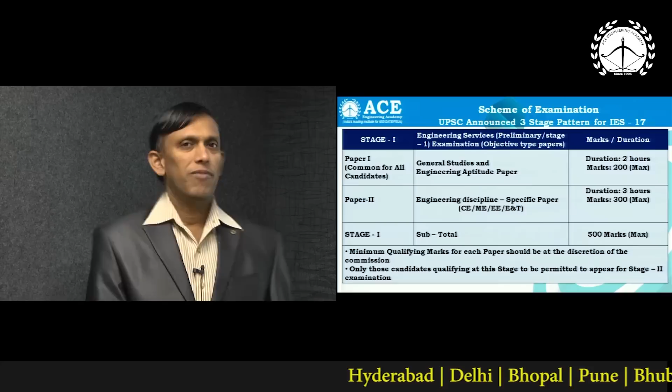I welcome you to the awareness session on IES for the revised scheme announced recently by UPSC for 2017. You know, the pattern has changed.

So it has a three-stage or three-tier system. The stage 1 is preliminary. This preliminary exam, stage 1, is likely to be conducted in the month of February 2017. So this preliminary part, stage 1, will have two papers.

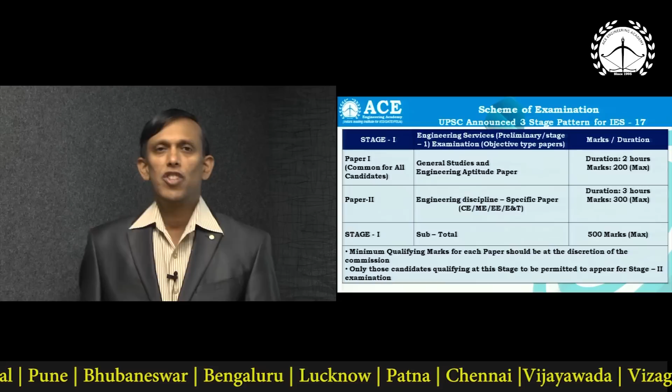Paper 1 is common for all branches - civil, mechanical, electrical and electronics and communication. It is general studies and engineering aptitude. This particular paper has 2 hours duration and 200 marks, a very deciding one.

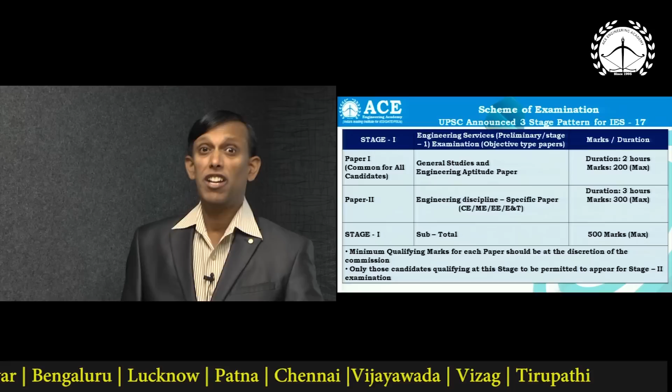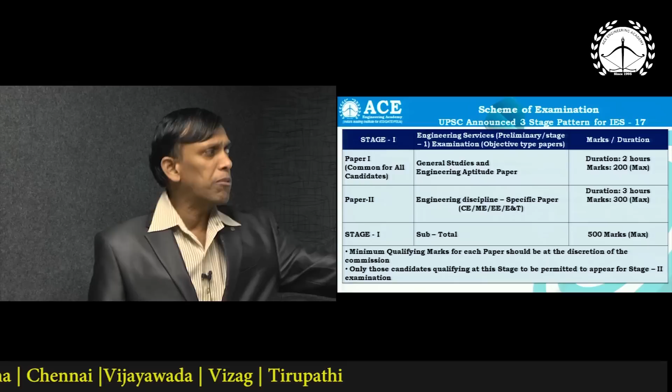The second paper is engineering discipline. For you, it is civil engineering, the entire syllabus of civil engineering. Again, it is of 3 hours duration and 300 marks. So the subtotal of stage 1 is now 500 marks.

So if you clear this stage 1 with the maximum possible score, then only you can enter stage 2. UPSC may decide the number of candidates to be selected for mains in the ratio of 1:10 or 1:12, or at their discretion. Now let us see stage 2.

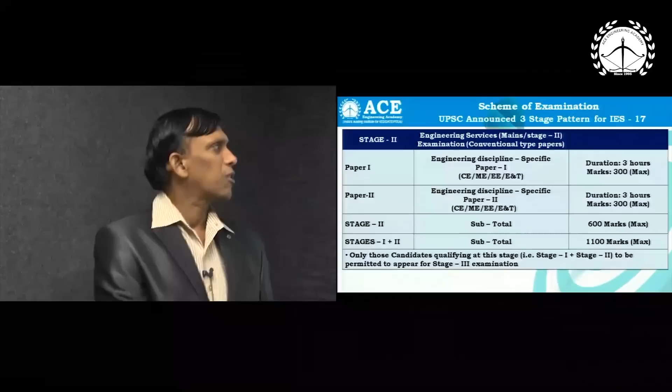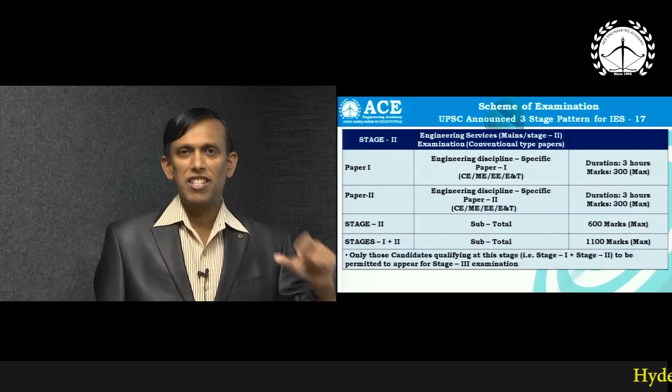So stage 2 is with respect to engineering. We are civil engineers, so there are 2 papers. The entire civil engineering syllabus, which is in prelim, is now divided into 2 papers. Paper 1 is 3 hours duration, 300 marks. Paper 2 is 3 hours duration and 300 marks. So the subtotal for stage 2 is 600 marks.

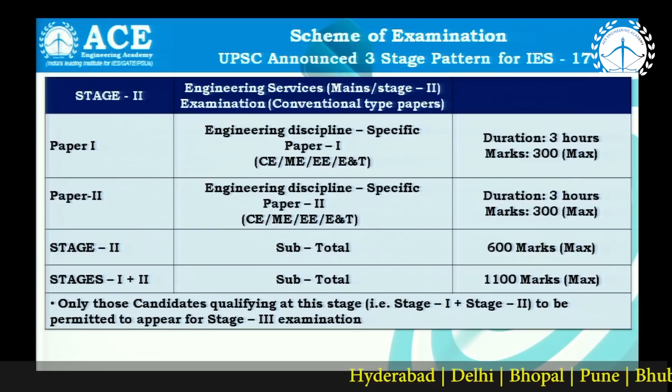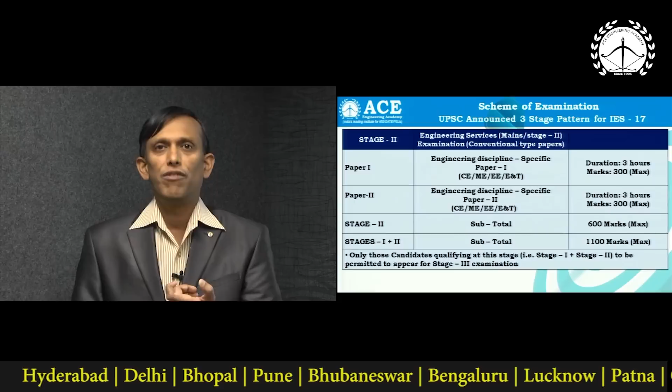Now, as you know, the final written marks - not only of stage 2, even stage 1 also - will be included. So the total of stage 1 and stage 2 will be 1100 marks. Now based on your combined score of stage 1 and stage 2, students will be called for the final stage, that is personal interview, generally in the ratio of 1:2.

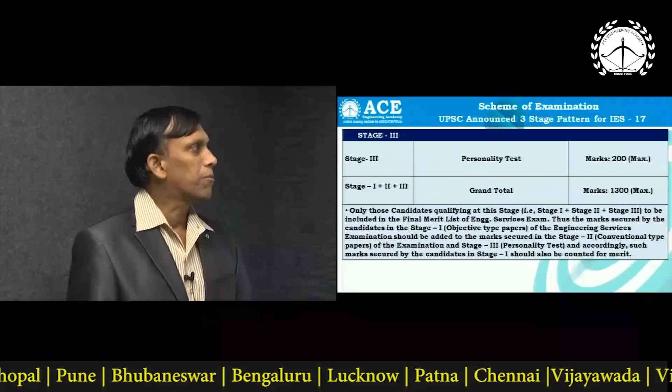So for stage 3, the personality test, as usual, maximum marks are 200. Now the total of stage 1, stage 2 and stage 3 is 1300 marks. Of these 1300 marks, whoever scores the highest, they will be the rankers or they will get the jobs.

Now let us see what is the importance of stage 1. It is almost, I can say, a new syllabus. Compared to the previous syllabus, I say that minimum 80% is new change.

As you know, general English is almost kept aside, maybe for the benefit of rural area students, or since engineering education is in English medium, it might have been kept aside. The traditional general studies subjects like history, geography, polity, biological sciences, etc. are also a little bit kept aside.

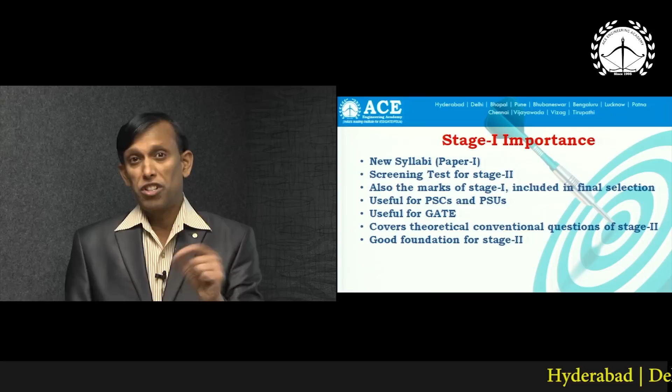So anyway, nothing to worry. As I said, this is not only a screening test for stage 2, but the marks of stage 1 will be included in the final selection. So it is not only screening, but also it is going to be a deciding factor for your final selection.

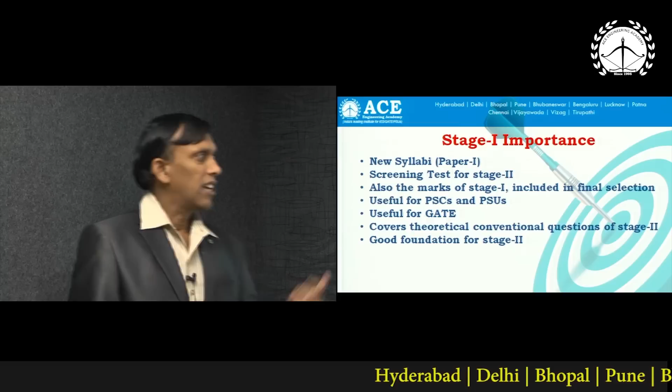So it is also useful for public service commissions and PSUs. I am watching the syllabus of various state service commissions in India for the last few years. The syllabus of various state service commissions and generation corporations has changed a lot. Now the new syllabus of particularly civil engineering is almost matching with the syllabus of various state service commissions.

So if you prepare for stage 1 of civil engineering seriously, sincerely, not only can you crack IES prelims, but also the State Service Commission Group 1 positions. Yes, not only State Service Commissions, it is also useful for PSUs, public sector undertakings.

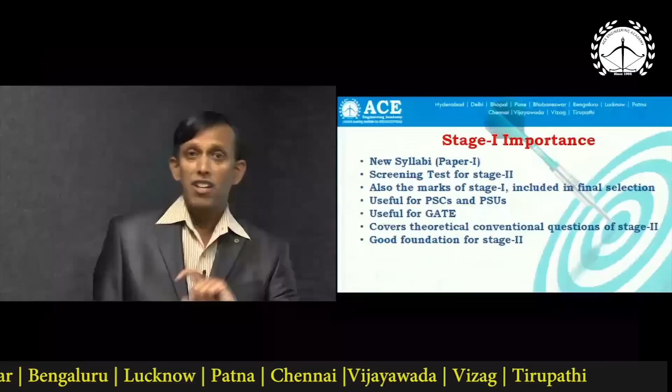In the stage 1 engineering aptitude section, certain topics like basic engineering, basic project management, and environmental issues are included. There are certain public sector undertakings conducting their own exams like SAIL, CSIR, etc. In all these company papers, which are available on websites, basic engineering questions are appearing. So if you prepare seriously for this stage 1 or prelims of IES, you can easily crack some of the public sector undertakings' exams. So be focused on the prelims.

It is also useful for GATE. The stage 1 is basically objective. Engineering services objective questions will be mostly analytical, theoretical, conceptual. There will be some numerical questions also, but much use of calculator is not required. In the GATE exam, however, there will be main focus on numerical questions.

So what shall we do? Along with the stage 1 preparation for engineering services, solve a little bit of numerical questions too, which may take 2-3 minutes each. With this type of preparation, IES prelims will be useful even to crack the GATE exam, which is not only for higher education in premier institutes like IITs and NITs, but also to secure jobs in various Maharatna and Navaratna companies.

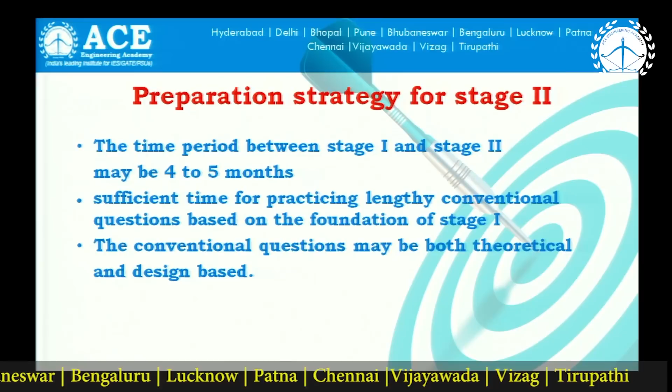Coming to stage 2: from my experience guiding civil services students, there is a minimum time span of 4 to 5 months between prelims and mains, because of so many operations involved in between. I expect UPSC will definitely give a span of 4 to 5 months for engineering services also. Is this sufficient? Perfectly sufficient, extremely more time I'd say.

So with these 4 to 5 months, what do you have to do? See, the foundation is already over. You have studied the theoretical part thoroughly. You don't compromise on anything as far as the theoretical part is concerned in stage 1. You have built up a very solid foundation. So with that foundation, preparation for stage 2 is a cakewalk, dead easy.

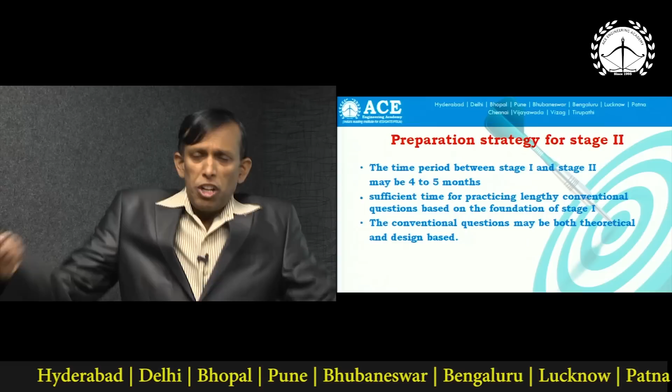It is solving nothing but lengthy conventional questions. According to my expectations, these mains questions may be, to some extent, in the pattern of civil services, with theoretical questions, conventional derivations, and also questions related to design aspects of civil engineering. It may be RCC design, steel design, or design combining structural analysis with RCC—a continuous beam given, and you have to design an RCC beam. Long ago when we used to write the IES exam, lengthy questions mixing two different subjects used to be there, so I am expecting that type of intermixing again.

The conventional question, as I said, may cover both theoretical and design aspects. So my dear student children, be focused. If you are a fresher, be strategic and have the right plan. With the right plan, there is no doubt you can clear prelims. It's not only a question of clearing, but you should secure at least 400 marks out of 500 in the prelim exam.

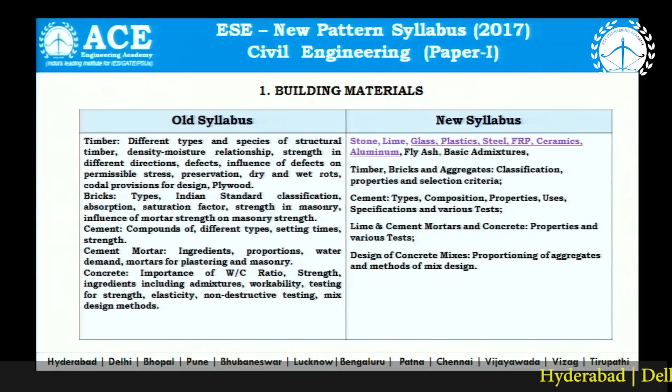As usual, there are 6 parts. The first part is building materials. Most of the building materials are as it is kept in the new syllabus, but a lot of new things are added, lot of conventional things are added. The new thing is the advanced thing, FRP, fiber reinforced plastics.

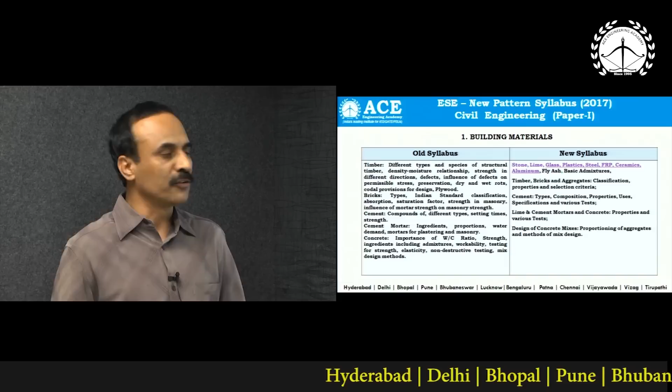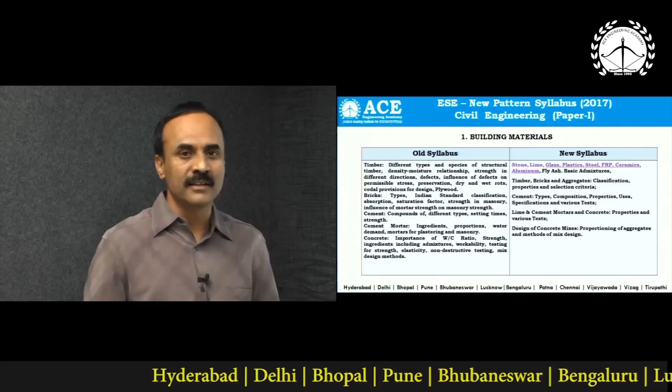All others are the conventional old methodologies. They have given emphasis to introduce all the sorts of building materials into the new syllabus. A little burden to the preparation, but however, theoretical aspects with a little conceptual and specificational memorization, one can become powerful in this area.

Points to remember: stones added, lime added, glass, plastics. Nowadays plastics are playing very important role. Along with plastics, FRP, fiber reinforced plastics, added.

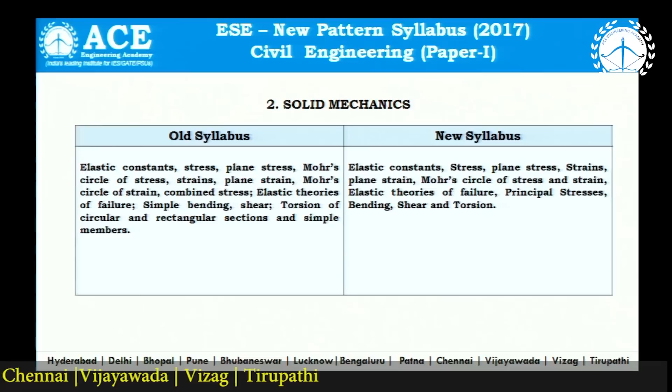Coming to the second subject, solid mechanics, old and new as it is. The new seems to be slightly concised, but actually speaking, most of the things are in short mentioned. It is nothing but a bit elaborated compared to the old. Old is to the point, now it is a bit elaborated. Points to remember: no changes broadly.

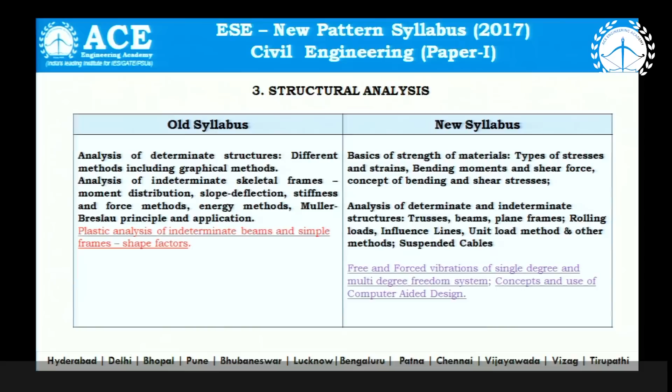Coming to the third part, structural analysis. In the old syllabus, plastic analysis and shape factors were there, but in the new syllabus they are not mentioned. But however, without this topic, structural design by limit state is not possible. So it is nothing but hidden.

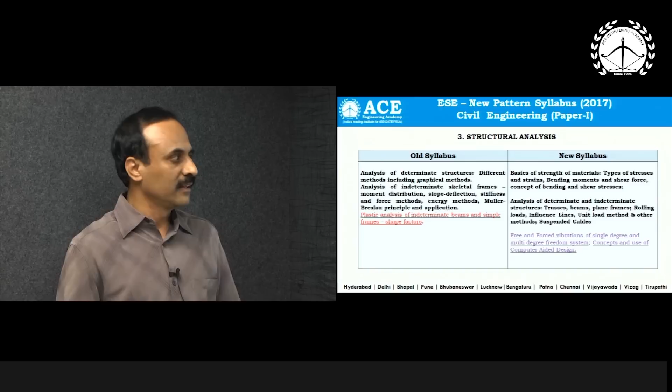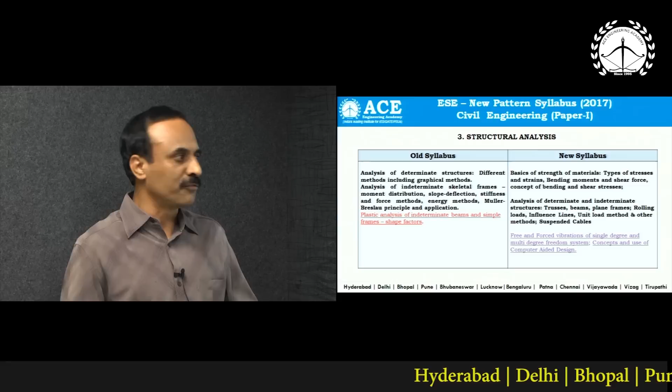And in the new syllabus, almost structural dynamics is added, free and forced vibrations are also added, with multi-degree freedom also mentioned. So it is a bit elaborated as far as the structural dynamics aspect of the syllabus is concerned.

Computer aided design concepts are added. It gives a sort of fundamental concepts behind the computer aided design. Things like finite element analysis, matrix approaches, and other relevant matrix correlations will be added into the syllabus.

Points to remember: plastic design hidden and structural dynamics added.

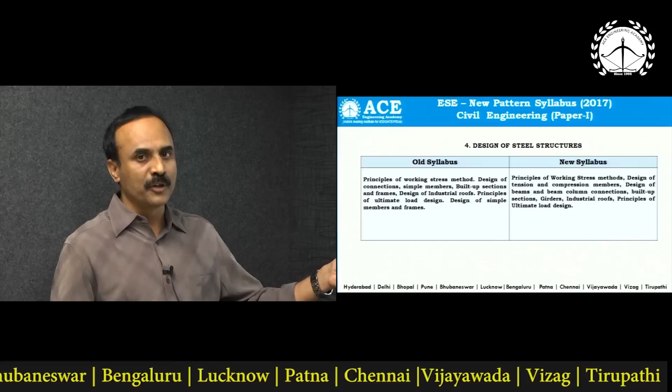Coming to the fourth, design of steel structures as it is, no changes at all. And in the design of steel structures, we require the plastic analysis, shape factors, all the other things. Points to remember: almost no changes.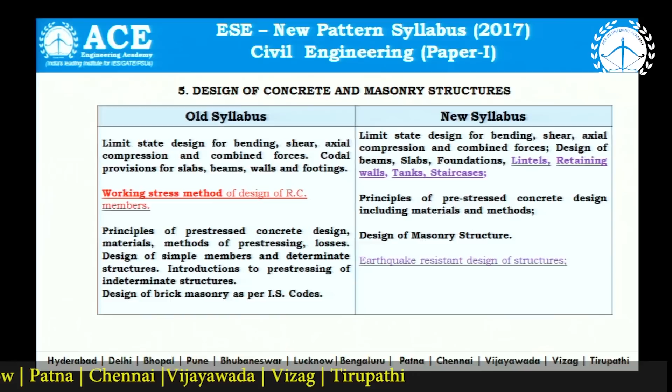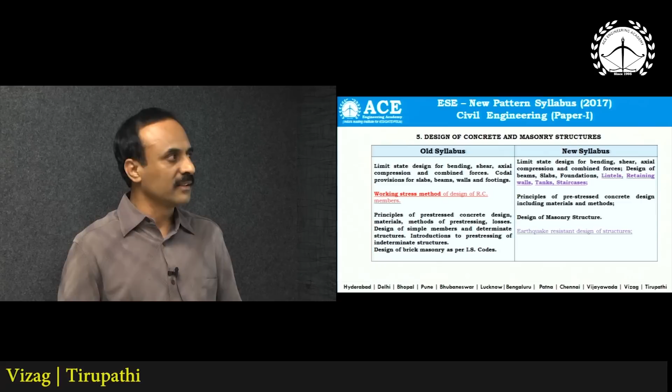Coming to the design of concrete and masonry structures, working stress method concepts are hidden in the old syllabus. Without working stress concepts, the newly added water tanks are not possible to design. But however, in the new syllabus, lot of things introduced: lintels, retaining walls, water tanks, staircases.

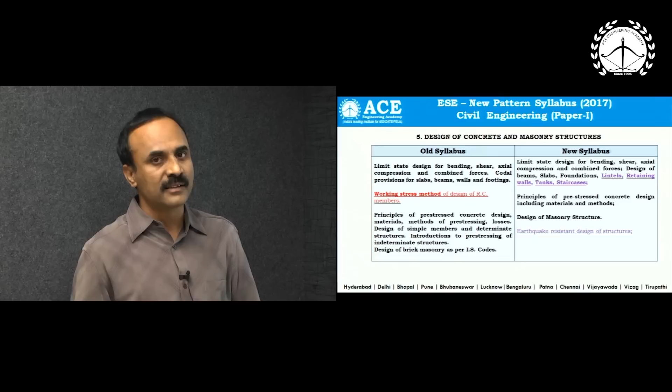This is extra burden to the people who are preparing. Actually speaking, all these fundamental things require lot of attention, lot of codal specifications, and lot of emphasis on the use of codes, especially water tanks, staircases.

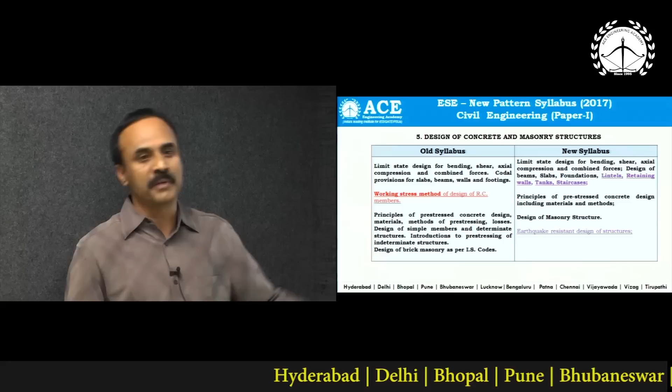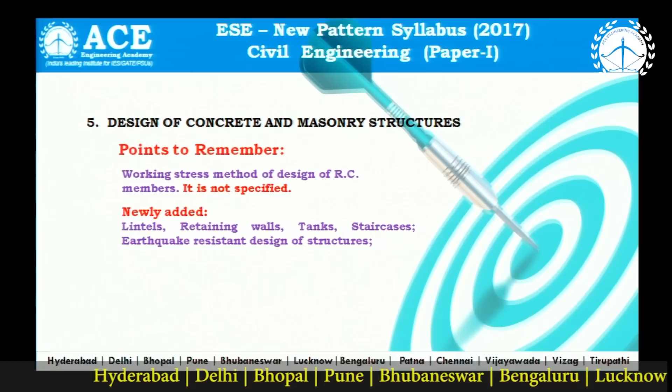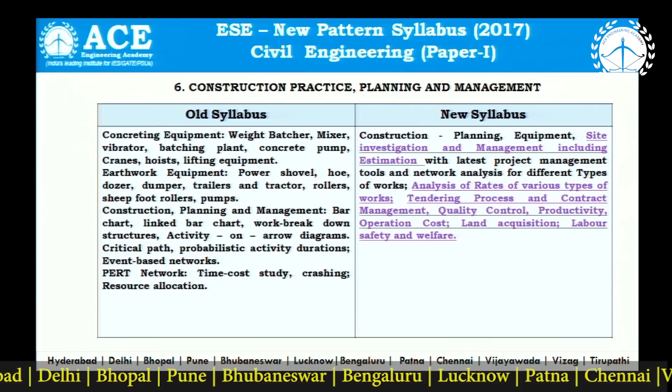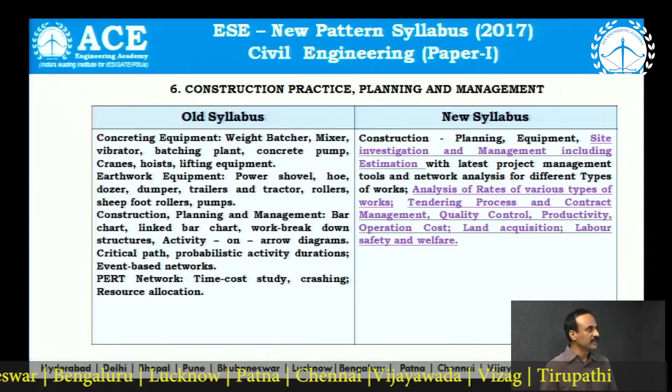Coming to construction practices, planning and management: old syllabus was lengthy, but each and every small topic was explained there. In the new syllabus, most of the practical relevant things are added, especially starting from the land acquisition to labor safety, welfare, rate analysis, tendering, contracts. Most of the practical relevant things are added.

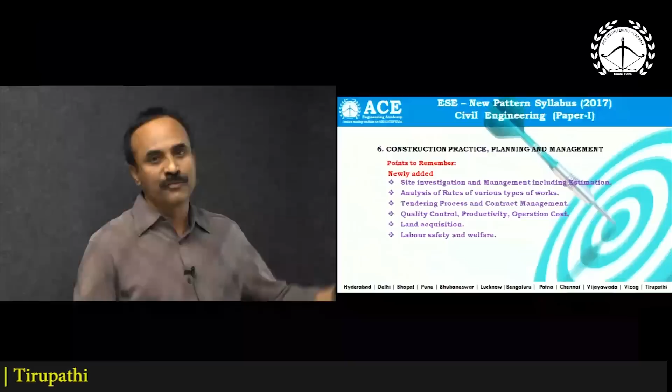It seems they are expecting people with practical knowledge to come into the services. And the points to remember: these are the things added. Management is also included. For a good UPSC engineer, management and all other practical relevancy is required apart from safety and welfare. These things are also added.

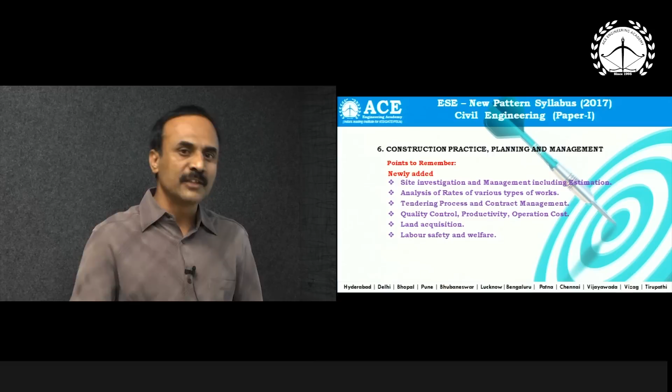Mostly these things are theoretical concepts, but however, there may be a chance of theoretical convention in this area. People with good explaining capacities and IQ levels can do well in this area. So overall, there is around 10 to 15% of extra syllabus in paper 1, and most of the things are theoretical except in RCC, structural dynamics, and all. Except that, most of the things are not requiring that much preparation, but however, people with keen interest, keen aspiration can definitely prosper well in this area.

It is better for the people who are going to join engineering services with upgraded knowledge. Definitely, this added syllabus will contribute to the growth of the nation, directly or indirectly. Thank you very much, I wish you all the best.

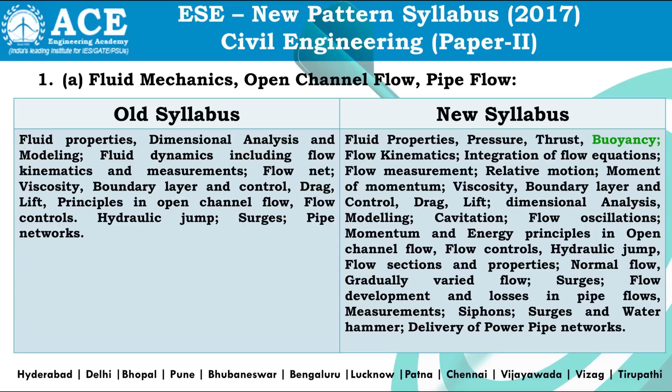Hi, this is Ayub Khan. I will talk about paper 2 of the technical subjects of Engineering Services Examination 2017, new pattern. As you all know, this paper 2 has totally 6 subjects. In the new pattern of the syllabus, all the 6 subjects have been retained.

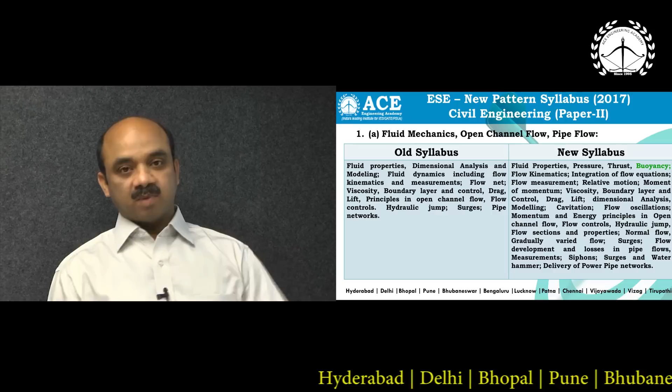In addition, a few topics were added in a couple of subjects. Now I would like to discuss this in detail, subject wise. To begin with, let us take up the fluid mechanics subject. As you all know, in paper 2, this particular subject carries a lion's share of the weightage.

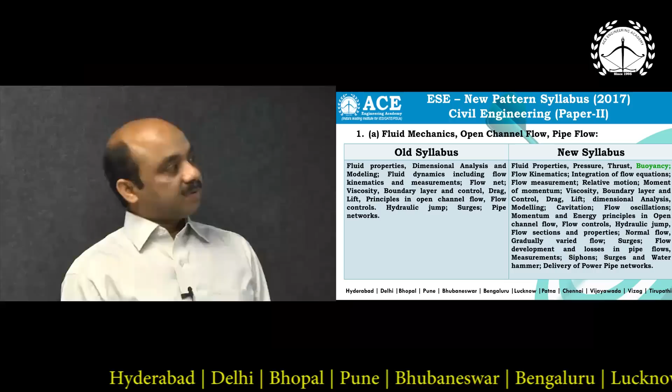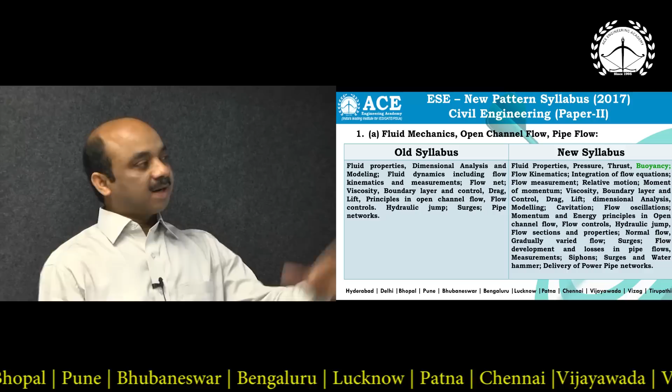Here if you see the old syllabus and new syllabus, don't bother to read the entire details here, not necessary. I will give another slide with a summary of this entire subject and what has changed. The old syllabus looks very brief, the new syllabus looks elaborate, but the content is the same for fluid mechanics, open channel flow, and pipe flow. Similarly for hydraulic machines and hydropower, the old syllabus looks brief and the new looks elaborate, but finally the content is the same.

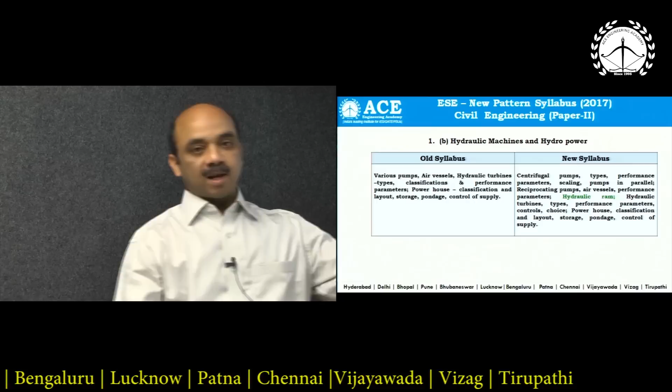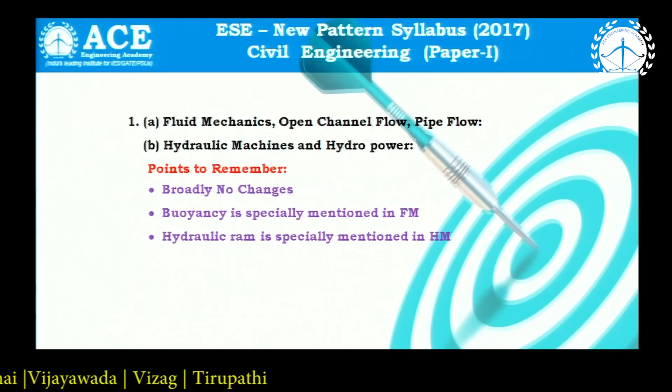Now I would like to make a summary of this entire subject with the next slide. So upon comparison of the old and new syllabus, finally what you can conclude is there are no changes at all. But the topic buoyancy is specifically mentioned in the fluid mechanics area, as well as the hydraulic ram topic specifically mentioned in hydraulic machines. Except for that, there are no changes at all.

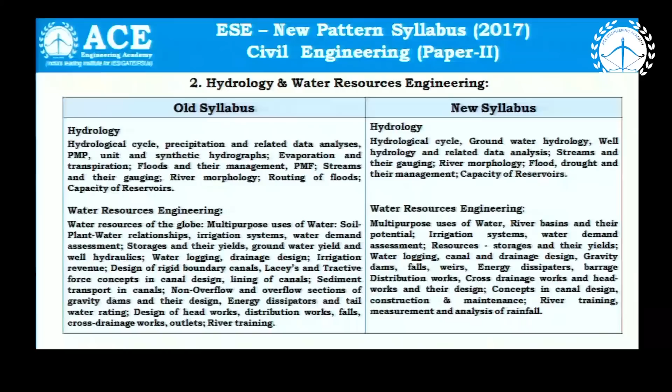Now we will move to the next subject, that is hydrology and water resource engineering. You can see this hydrology as well as water resources syllabus, old as well as new. Absolutely both topics are the same. But however, you can notice one thing.

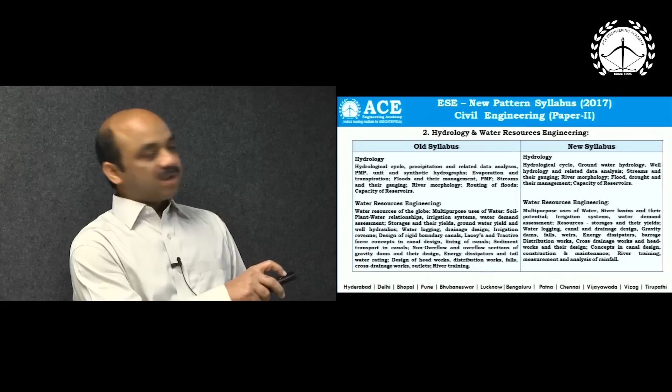In the case of the old syllabus, the unit hydrograph and synthetic unit hydrograph topics were specifically mentioned. In the new syllabus it is not explicitly mentioned, but it is implicitly understood, because the hydrological cycle is inclusive of hydrographs as well. So the old syllabus and new syllabus are absolutely one and the same.

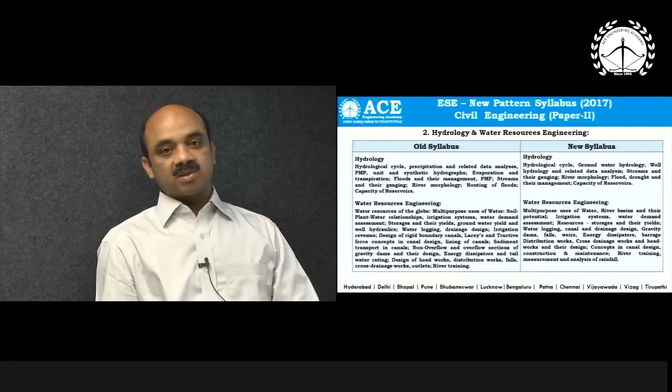So I would like to make a formal summary again of this hydrology and water resource engineering. There are no changes at all as far as this subject is concerned. Now we will move to another subject, that is environmental engineering.

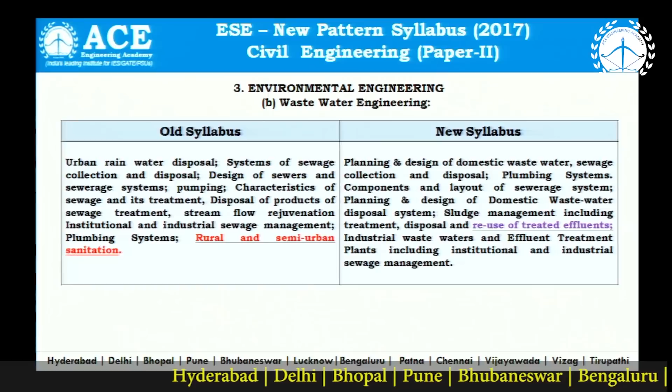It is given in three parts. Part A consists of water supply engineering, the old and new syllabus absolutely same, as well as part B wastewater engineering, old and new syllabus. We have a small change, that's it. In the case of the old syllabus, rural and semi-urban sanitation is not specifically mentioned in the new syllabus pattern. Now I have the third part, air pollution, noise pollution, as well as ecology.

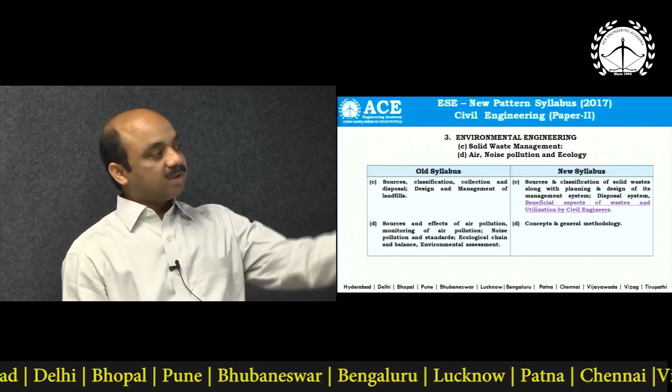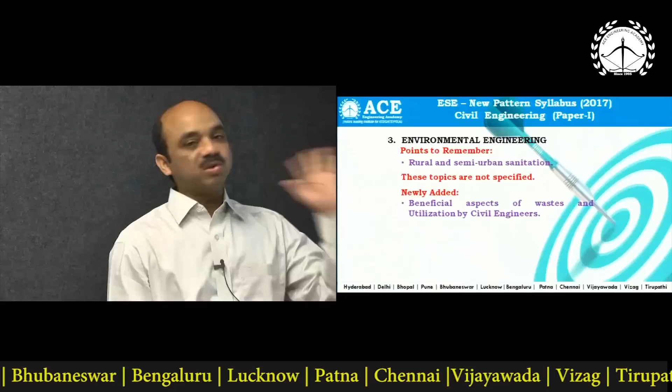Here if you finally compare, we have a small topic additionally added in this new syllabus. Anyway, I would like to summarize the entire environmental engineering subject in this new slide. So upon comparison of the old and new syllabus in environmental engineering, finally what you find is a small topic, that is rural and semi-urban sanitation, is not specifically mentioned in the new syllabus. And in the new syllabus, a small topic is added further.

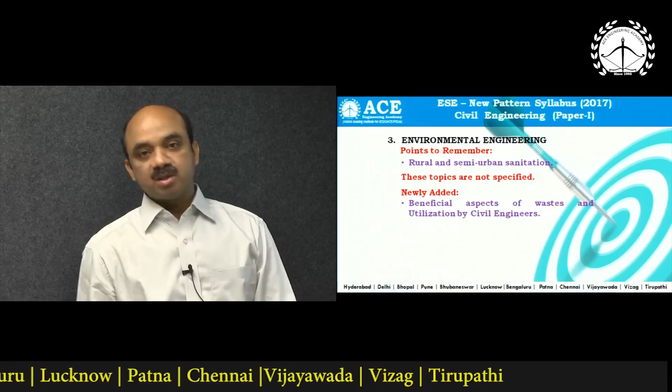That is nothing but beneficial aspects of waste and its utilization by civil engineers. This comes under solid waste management. Except for this small addition, there is absolutely no change at all as far as the subject is concerned. Now we'll move to another subject, that is geotechnical engineering and foundation engineering.

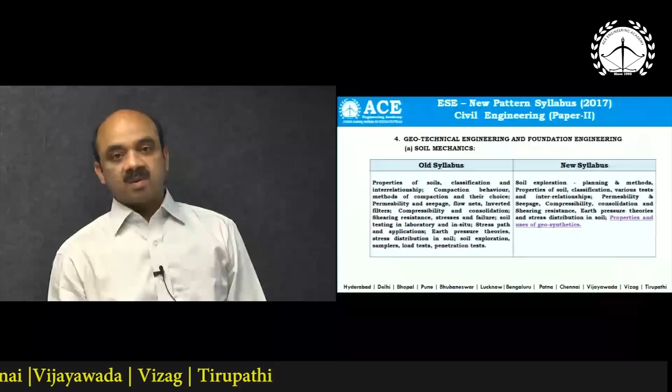This is another important subject in paper 2 of the engineering services examination. Here again you can see the old and new syllabus, and you can see a new topic added in this new syllabus, that is nothing but properties and uses of geosynthetics. I will talk about this afterwards.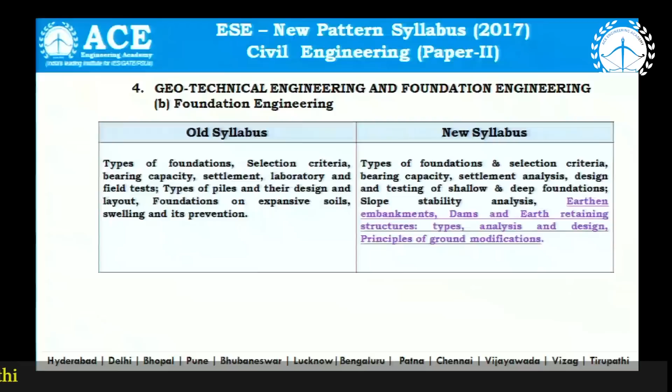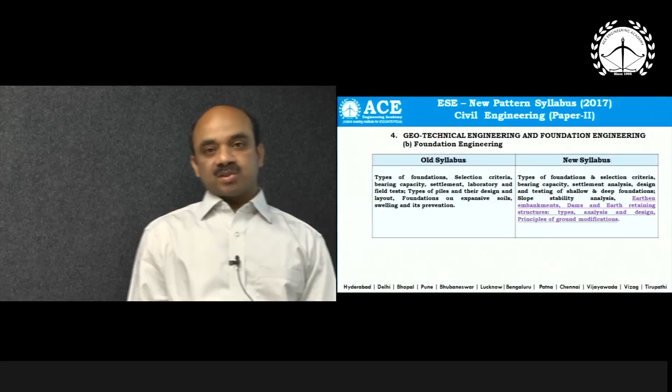Now you can see the foundation engineering comparison. In the new syllabus, 2-3 topics were additionally included, that includes ground modification and earth retaining structures, types and analysis. Now finally if you compare soil mechanics and foundation engineering subject with respect to old and new syllabus, finally we have this summary.

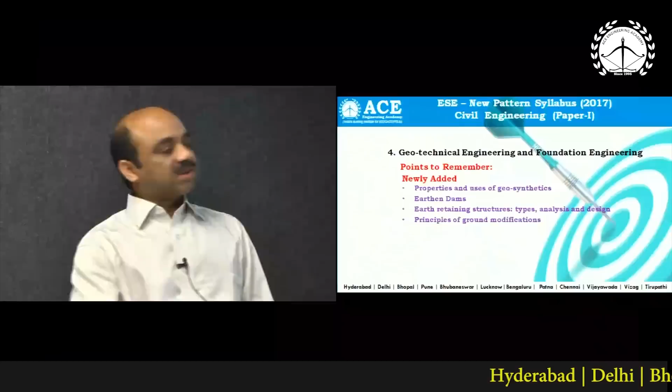That is, in the new syllabus, properties and uses of geosynthetics is added. This geosynthetics topic is the latest development in civil engineering in general and soil mechanics in particular. Here you will have to study the various types of these geosynthetic materials, their properties, their functions, and their other applications. And another one, earthen dams topic is also specifically included in the new syllabus.

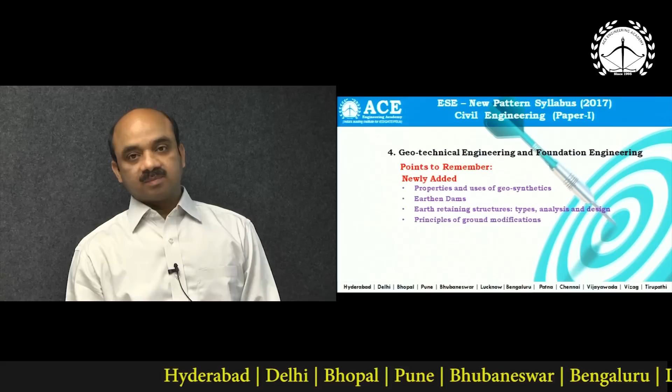Of course, in the old syllabus there was a topic called slope stability analysis, but in the new syllabus this earthen dams topic is specifically added. So in my view, in this topic you will have to additionally study the different types of earthen dams, how we provide filter arrangements, drainage arrangements, and their methods of construction. So that is to be studied further, along with earth retaining structures and types of analysis and design.

In the old syllabus also there was a retaining walls topic, but in this new syllabus it was given specifically as earth retaining structures. This includes the conventional retaining walls of RCC masonry type, and in recent developments there is the RE wall, reinforced earth wall. You might have seen in most cities before flyover approaches, for want of space nowadays we go in favor of RE wall, which occupies less space. So in earth retaining structures you have to additionally study the RE wall analysis and design. That is one extra topic you have to specifically focus on.

Then we have the other topic called ground modification, which is nothing but ground improvement techniques. In some universities students study this in 3rd or 4th year as an elective subject. You don't have to go into the details of these ground improvement methods, but concentrate peripherally on the different methods, their relative merits and demerits, and their suitability. Overall, as far as this subject is concerned, there is around 5 to 10% of additional topics added there.

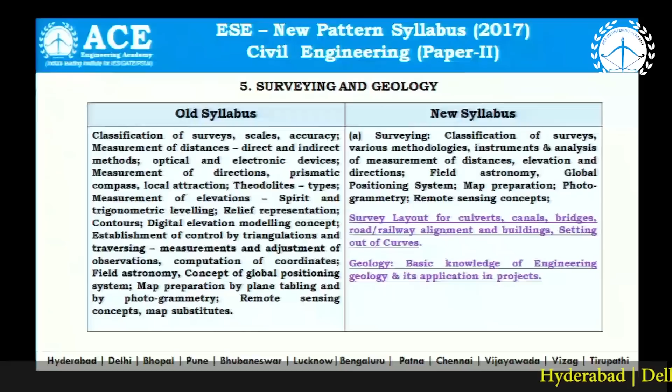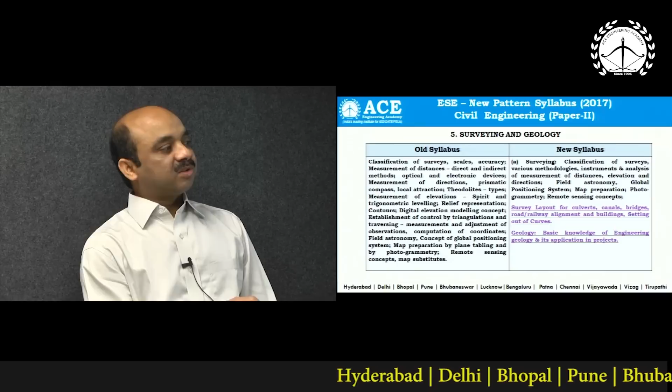Now we move to the next subject, that is surveying and geology. For the old and new syllabus comparison, you don't have to read through everything, I have a summary slide. If you compare old and new syllabus, you can see 1 or 2 theory topics were additionally specified. And apart from that, one notable observation is that in this category, a new subject called geology is included. Let me summarize with the next slide.

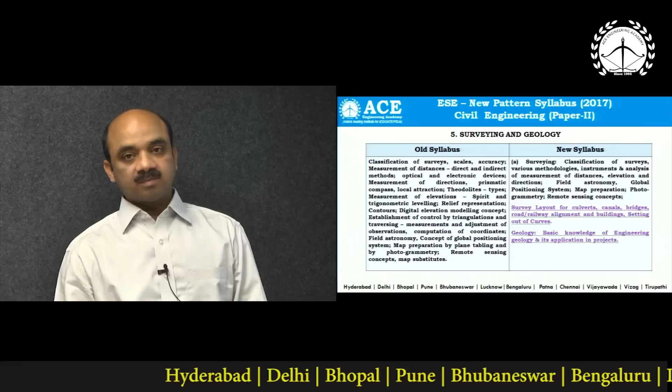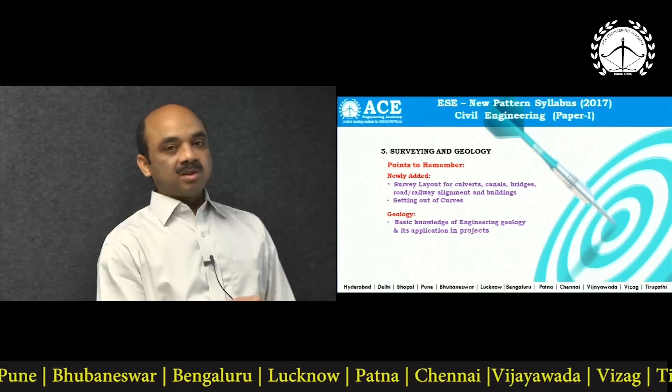As far as surveying and geology is concerned, in the survey subject a small topic called survey layout for culverts, canals, bridges, roads, railway alignment and buildings is newly added. Also, setting out of curves is added. In the old syllabus there were some fundamentals of curves, especially terminology, etc. Now in this new syllabus you have to study, in addition to the old one, an additional topic called setting out of curves, and the subject of geology.

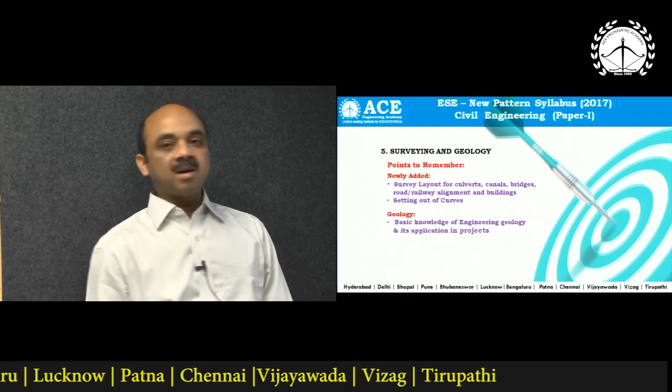Of course, you don't have to study the entire geology subject as a whole in this new syllabus. You have to focus only on the basic knowledge of engineering geology, as well as its application in some civil engineering projects. That's sufficient as far as this new syllabus is concerned with respect to this subject.

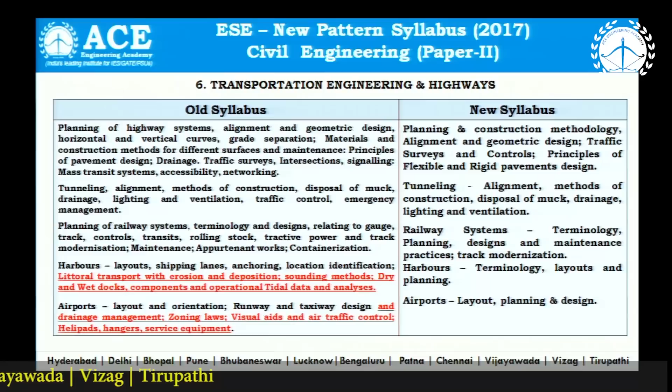Now we'll go to the last one, transportation engineering as well as highways. This includes a very broad syllabus of transportation engineering, railways, airports, harbors, all this. Here we have an encouraging point for students. Some of the topics which I have underlined here are not specifically mentioned as far as this new syllabus is concerned. Let me summarize in a formal way.

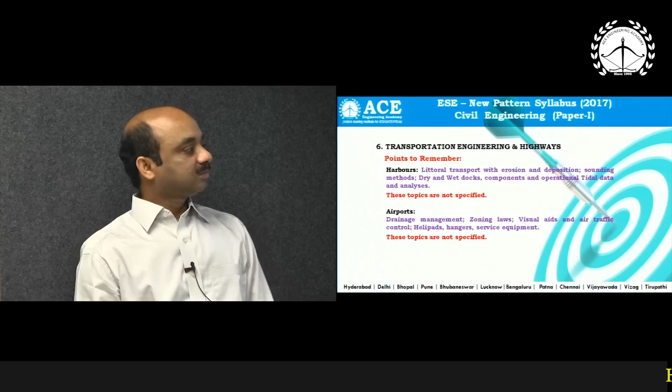As far as this subject is concerned, you can see in the case of harbors, this type of terminology is not specified in the new syllabus, so hopefully you can avoid concentration on these particular topics. Similarly, in the case of airports also, these topics were not specifically mentioned, so you can avoid these topics. Except for that, there is no change at all as far as the subject is concerned.

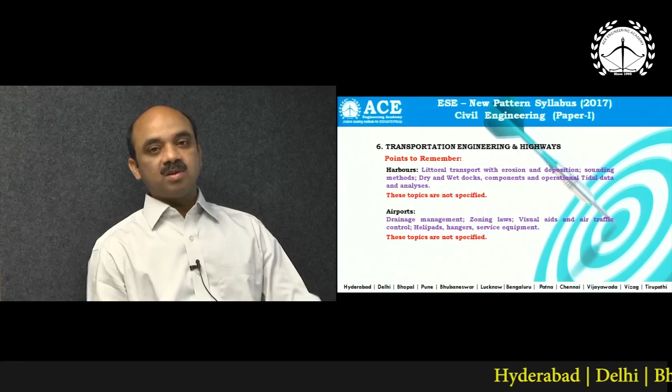So this is the only subject where you can see deletion of a few topics, but the entire subject is there, harbors is there, airports also there. A few topics were deleted, and they are basically some theory-oriented topics. So that's what about these 6 subjects.

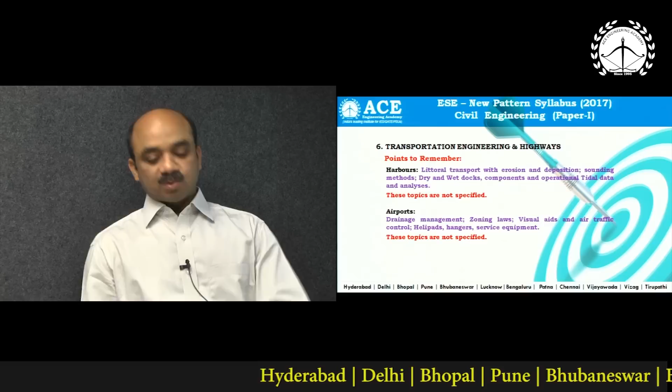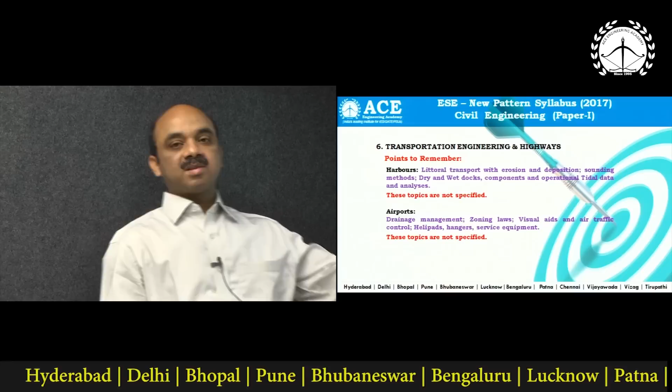As a whole, as far as paper 2 is concerned, in my view there is only around 10% extra syllabus in geotech engineering, one subject, and in the case of survey and geology, that geology subject is newly added. In survey also, 1 or 2 theory-oriented topics were additionally included. Overall, paper 2 remained with a small addition of around 5 to 10% extra syllabus in a couple of subjects, except there is no much change at all.